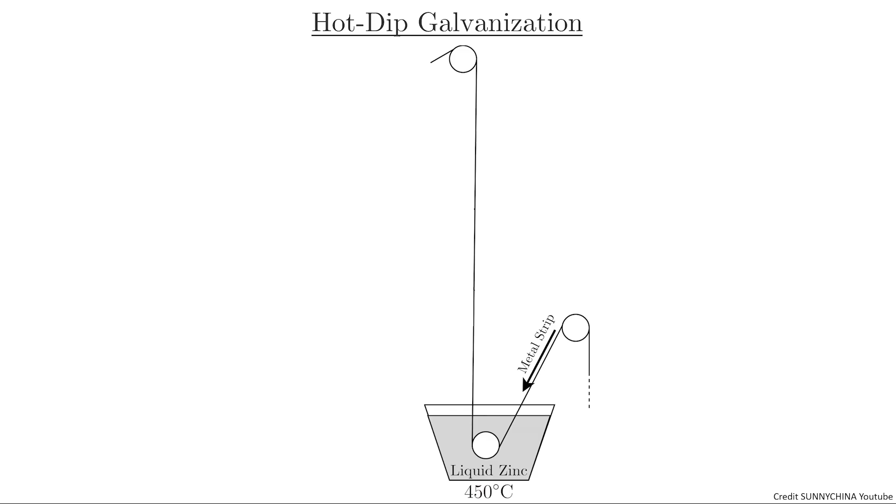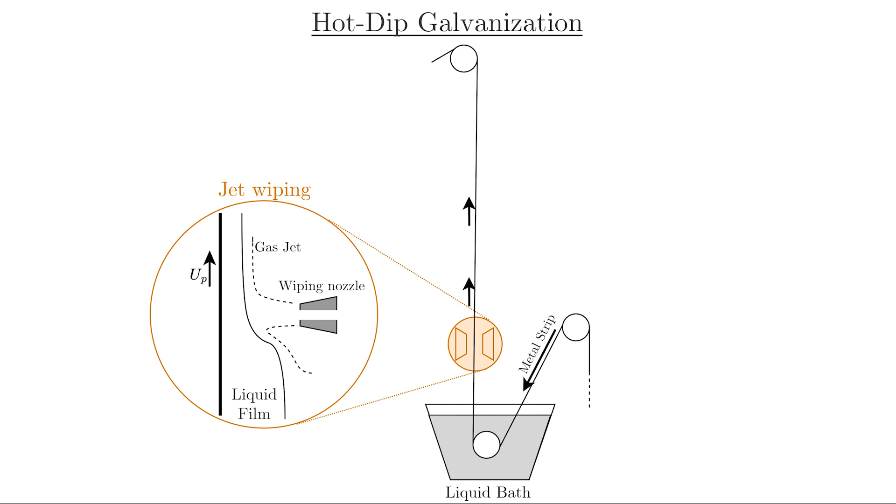The hot-dip galvanizing process consists of dipping a metal strip into a bath of molten zinc and then withdrawing it vertically at constant speed. The zinc entrained by this movement forms a thin liquid layer, which later solidifies into a corrosion-resistant coating. While still liquid, an impinging gas jet removes excess zinc to ensure the desired final coating thickness.

Withdrawing the strip too quickly can cause the jet to oscillate, leading to undulating waves in the liquid, which result in reduced final product quality and the need for additional surface treatments.

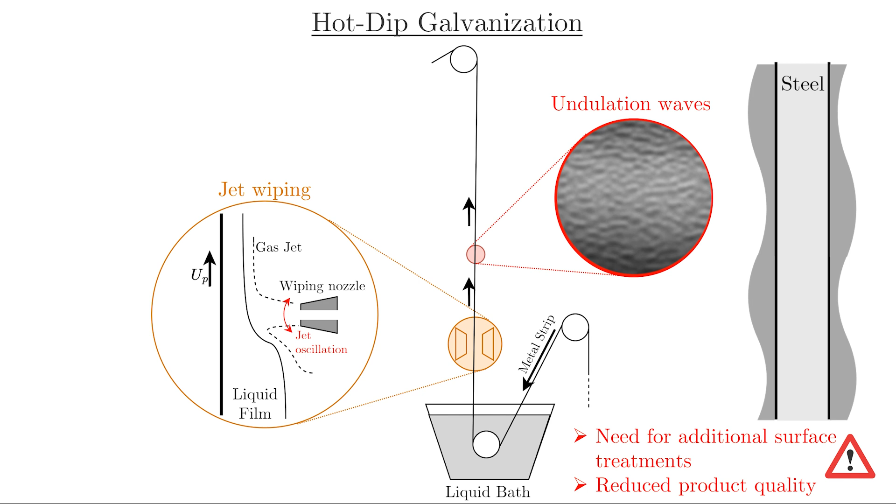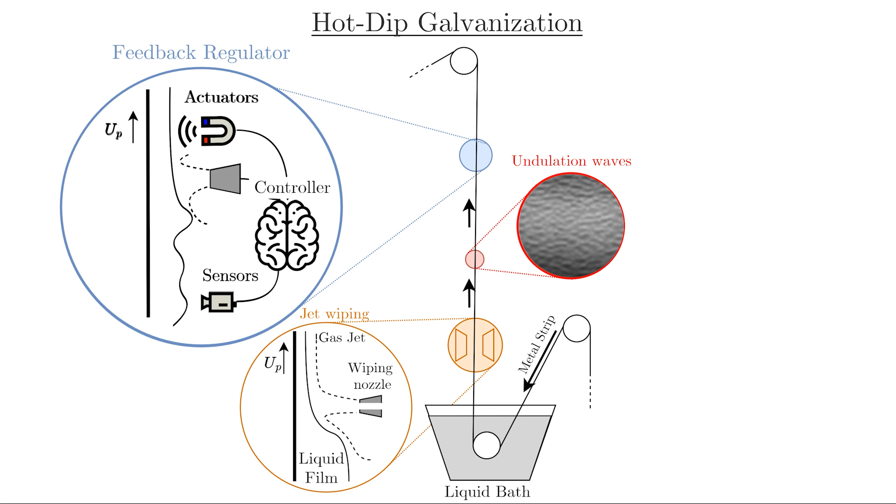To cope with this problem, a solution with a feedback regulator has been considered, where a series of actuators interact with the liquid film to reduce the amplitude of the undulation waves based on observation of the liquid film thickness from a set of sensors and following a control logic embedded in a controller.

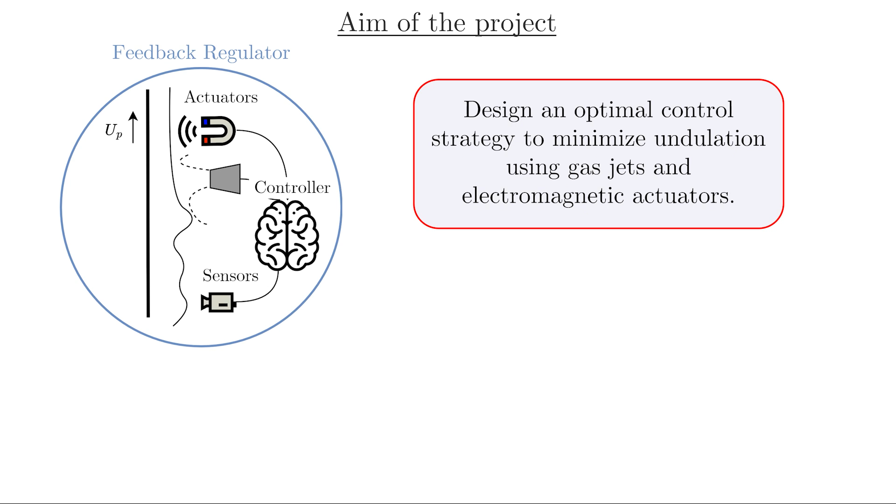The goal of this project is to develop an optimal control logic for the controller to minimize undulation waves using gas jet and electromagnetic actuators.

To achieve this goal, we addressed three main research questions: Where should we place the observation point? Can we simplify the governing equation to facilitate our analysis? And how can we design an efficient control law that performs well under different conditions?

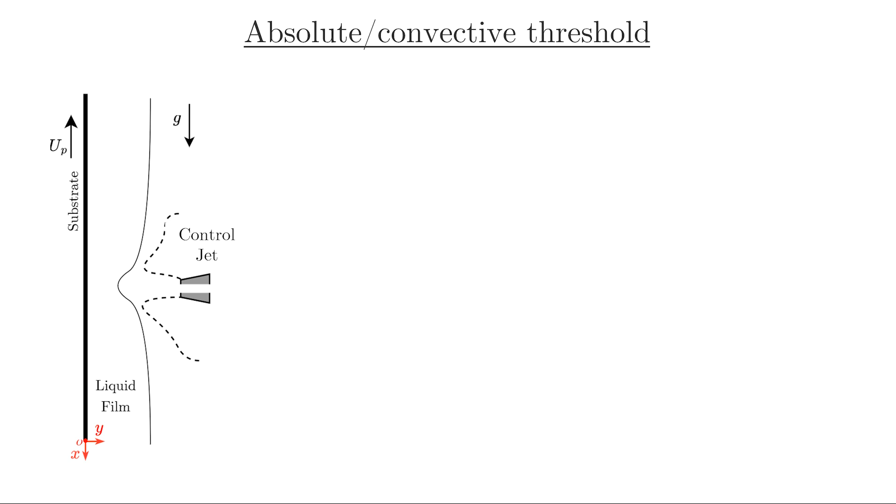To position the observation points, we studied the impulse response of the liquid film. So imagine a flat liquid film perturbed by an actuator. This disturbance generates waves that evolve over time in a way that depends on the film thickness.

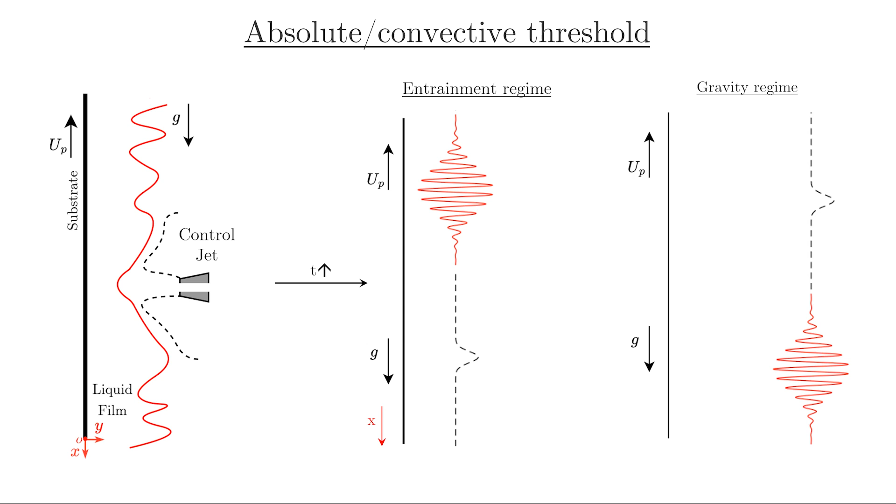In a thin film, the entrainment of the substrate causes the waves to be convected upwards, whereas in a thick film, gravity causes the waves to be advected downwards. Between these two extremes, there must be a range of liquid thicknesses where these waves spread throughout the entire domain.

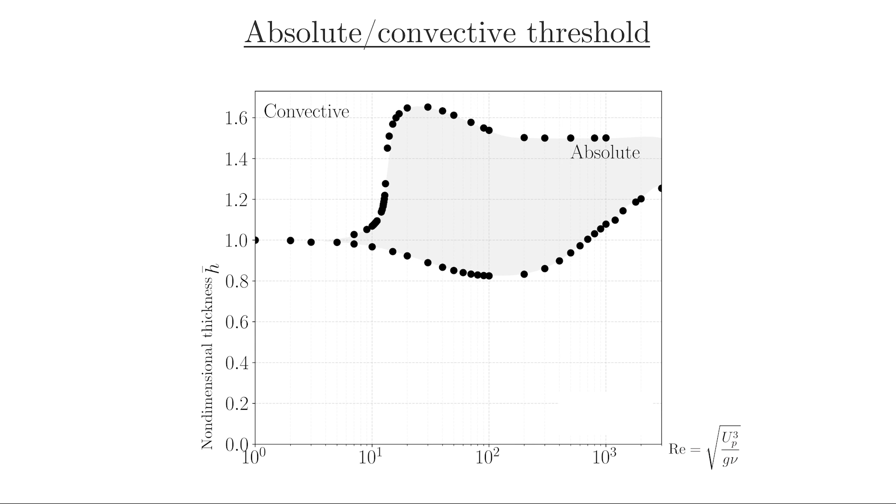Showing absolute instability characteristics, by solving the linearized Navier-Stokes equations, we identified this window of absolute instability in the space of Reynolds number and non-dimensional film thickness. However, as we can observe, the conditions of hot-dip galvanizing lie well outside this region.

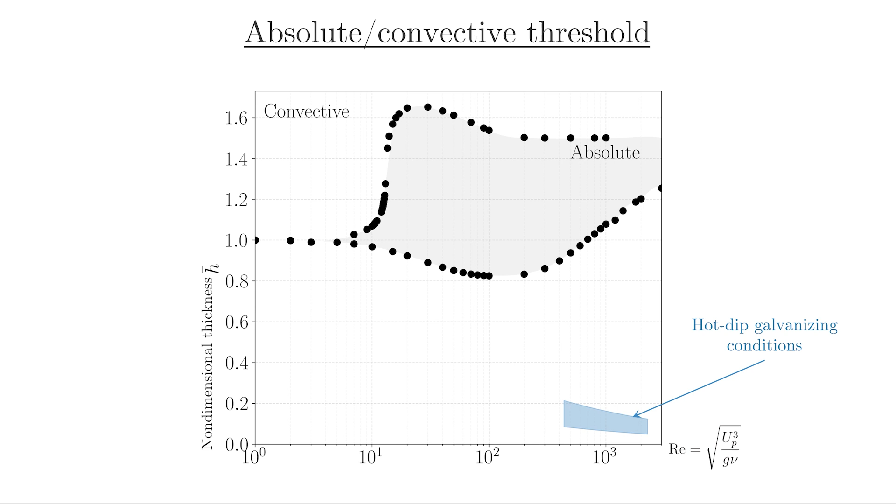This means that when we perturb the liquid film at a specific point, the disturbances will be carried upward. Based on this result, we can safely place the observation point upstream of the actuators, as their influence won't be captured by the observations, which only observe the incoming undulation waves.

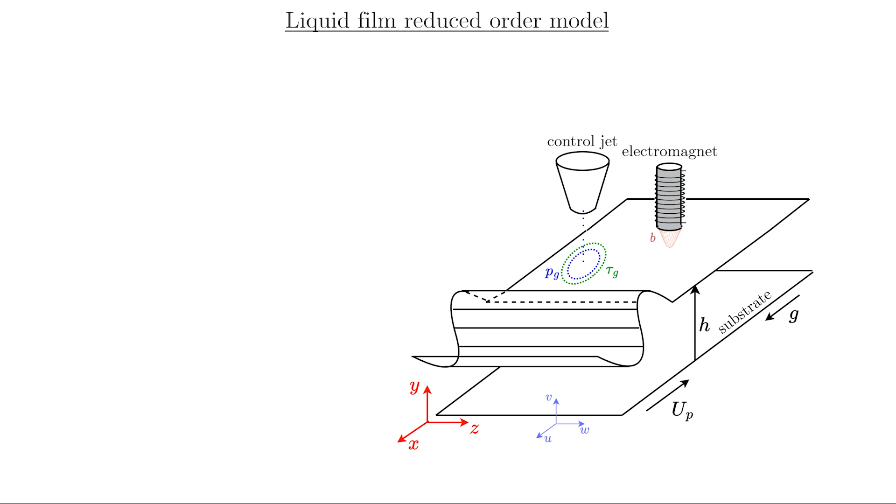So we now turn our attention to the simplified liquid film equations. The 3D liquid film affected by gas jet and electromagnetic actuators is governed by complex magneto-hydrodynamic equations, which are computationally demanding and challenging to solve.

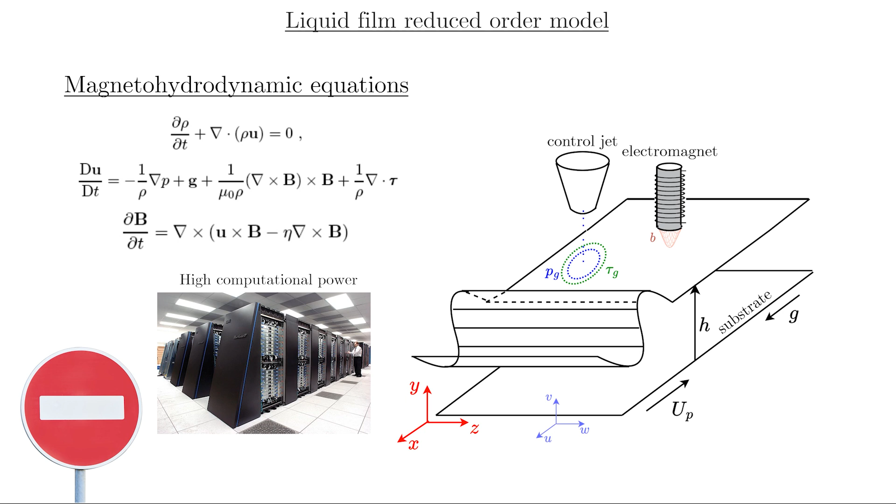So, to circumvent this problem while retaining the key physical characteristics, we developed a simplified model for the liquid film. This model consists of a system of equations in terms of the liquid film thickness H and the flow rate Q, where F is the flux matrix representing the convective effect, and S is the vector of source terms.

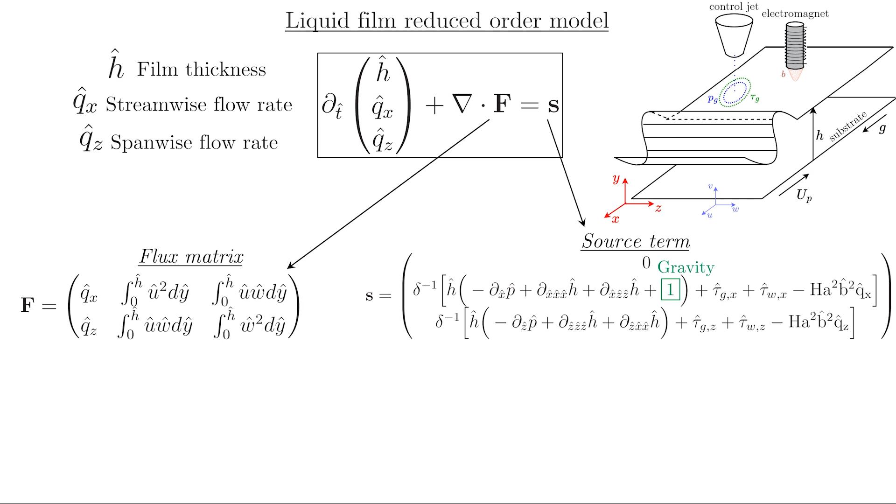Accounting for gravity, the shear stress at the substrate, surface tension which acts as a restoring force that brings the liquid film back to a flat state, the external actuators exert their influence through a pressure and shear stress distribution at the free surface, as well as a Lorentz force for the magnetic actuators which pushes the liquid downwards.

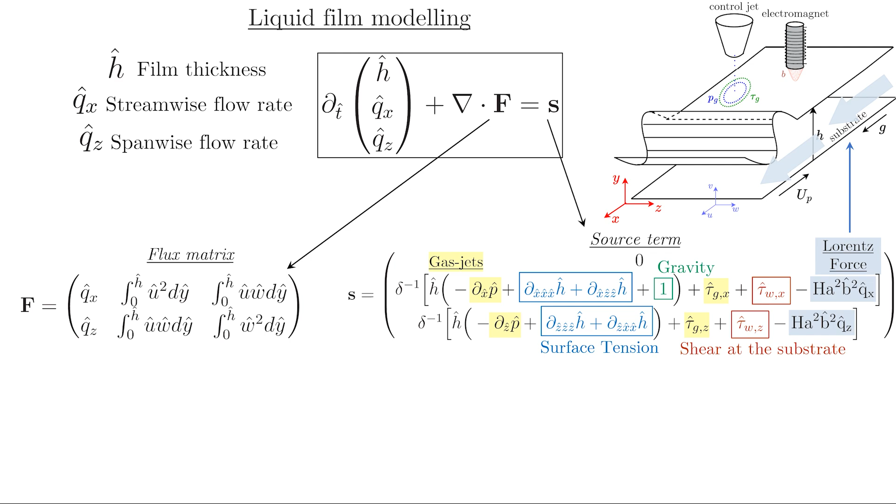With the observation positioned and the mathematical framework defined, we now derive the optimal feedback control law to manage the actuators based on liquid film observations. The optimal control law can be derived using two different approaches.

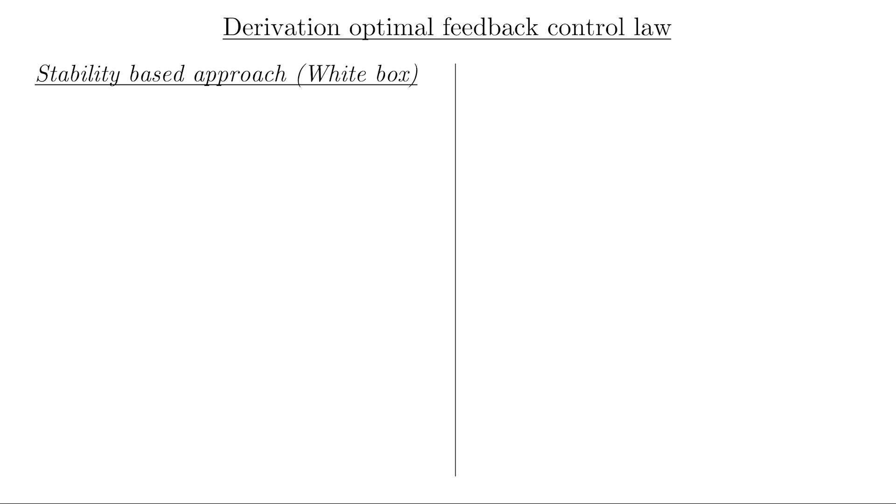White box and black box. A stability-based approach is white box: the equations of the simplified models are fully known. The control law is derived through linearization and optimization, aiming to determine the optimal feedback coefficient that ensures the liquid film is always linearly stable.

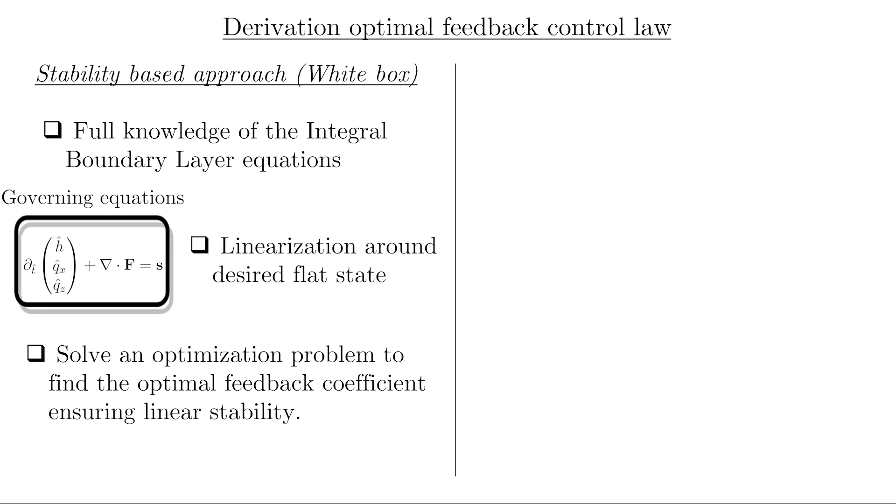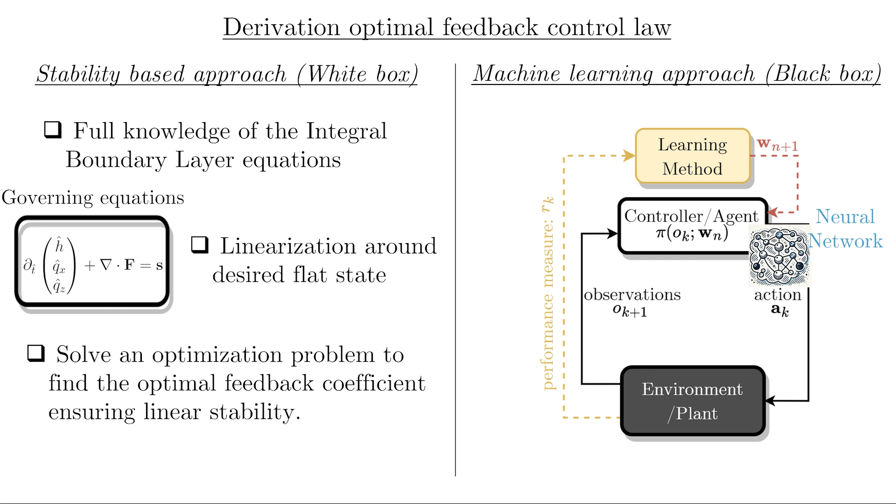In the black box machine learning approach, the governing equations are hidden in a black box. The only way to interact with them is by passing an action and receiving observation of the liquid film, along with a reward function that indicates how well the control action is performing. Based on this information, a new action is selected using a feedback control law provided by a neural network, whose weights are updated through a reinforcement learning algorithm to improve the controller performance over time.

The advantages of the stability-based approach reside in its speed, efficiency, guaranteed system stability, and reliance on a large body of established literature. However, it is limited to the linear dynamics of the system, is applicable only when waves have small amplitudes, and relies on predefined models. It also struggles with real-life conditions involving uncertainty and noise.

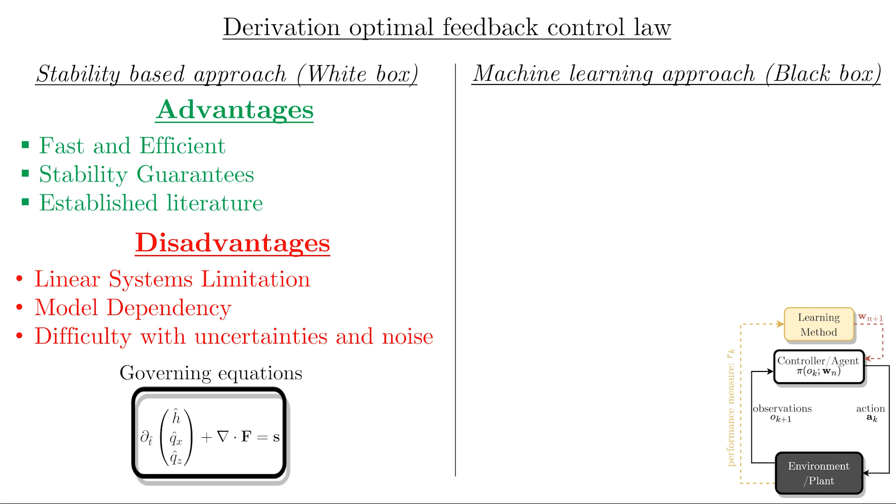On the other hand, the black box approach is independent of the model, can handle nonlinearities, and adapts easily to varying conditions. However, it lacks stability guarantees, is sample inefficient, requiring many liquid film simulations to learn the control law, and demands significant computational resources.

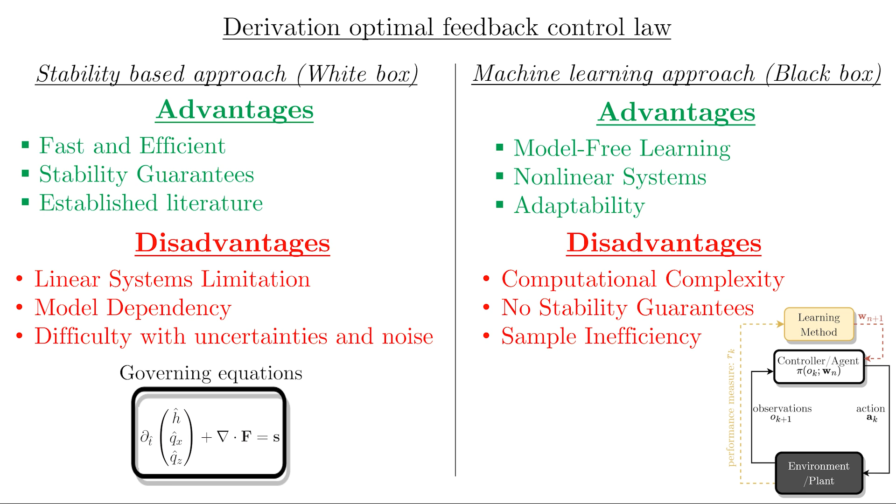Based on these considerations, we thought of combining the two approaches, using the machine learning approach to handle large amplitude waves, and then switching to the stability-based approach once waves become small enough.

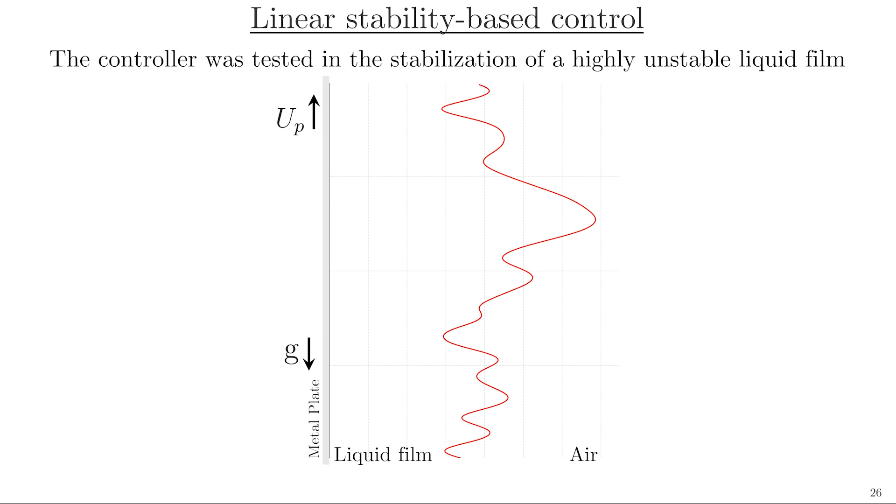To evaluate the performance of the linear stability-based controller, we applied it to control a highly unstable liquid film, one much more unstable than what is typically encountered in the undulation problem. In this scenario, waves go down the film while increasing in amplitude.

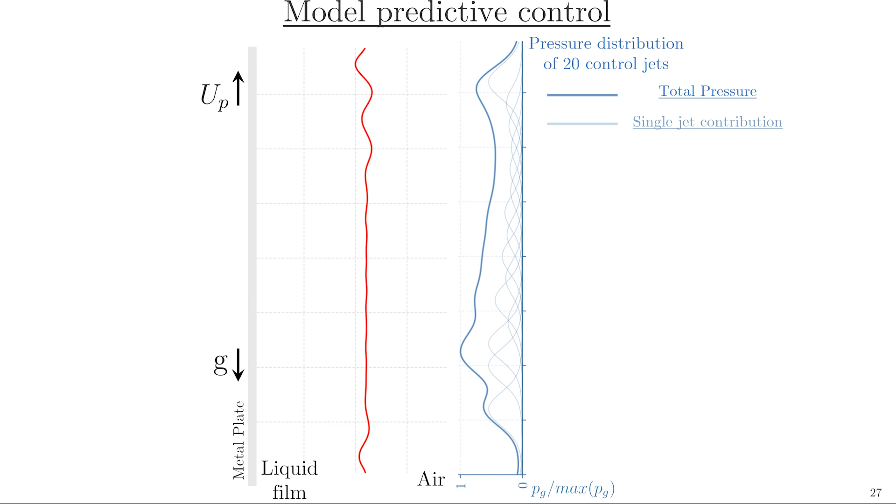As we can see, the control action begins at t=10, and within a limited amount of time, the actuators bring the liquid film to a flat state. Even after the film is flat, the actuators continue to operate, as it is an unstable equilibrium.

Moving now to the machine learning control for the large amplitude waves, we consider a setup with 2D gas jet and electromagnetic actuators working together.

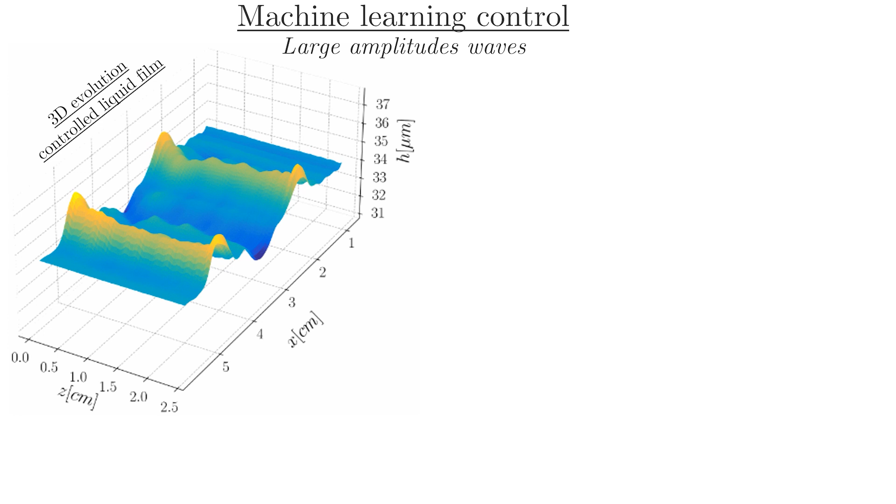We can see the 3D evolution of the controlled liquid film, its 2D color plot, the evolution of the gas jet intensity shown by the blue line, and the magnetic field intensity shown by the red line. Additionally, we have a plot along a line comparing the control case with the uncontrolled one.

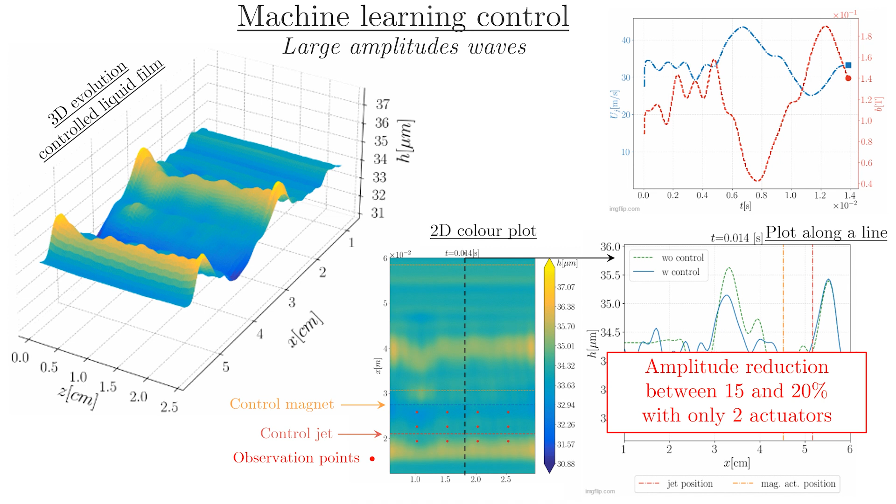The interaction of the actuators with the undulation waves is evident. The gas jet pushes the crest, while the magnetic actuators lift the valleys through the Lorentz force. This complementary control strategy reduced the amplitude by 15 to 20%, which is an excellent result considering only 2 actuators are used.

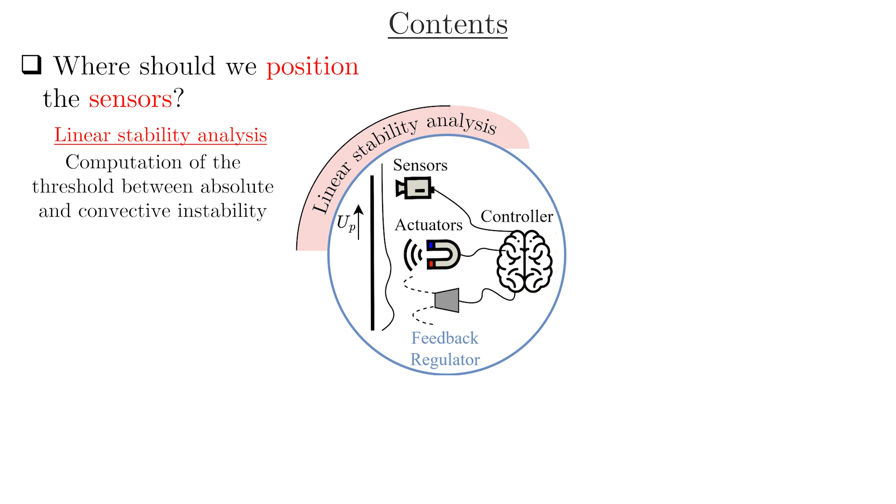To wrap up, in this research we have seen how we address a complex industrial problem using an interdisciplinary approach, which allowed us to answer both theoretical and practical research questions, leading to a sizable reduction of the undulation amplitude.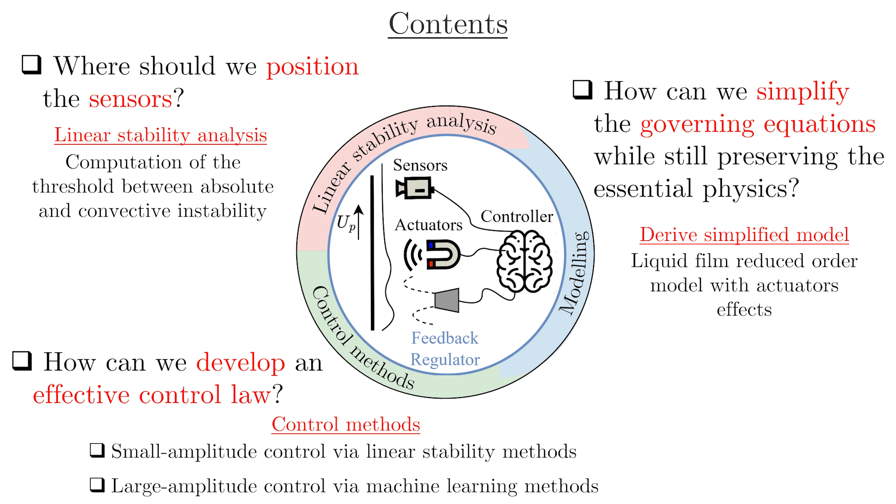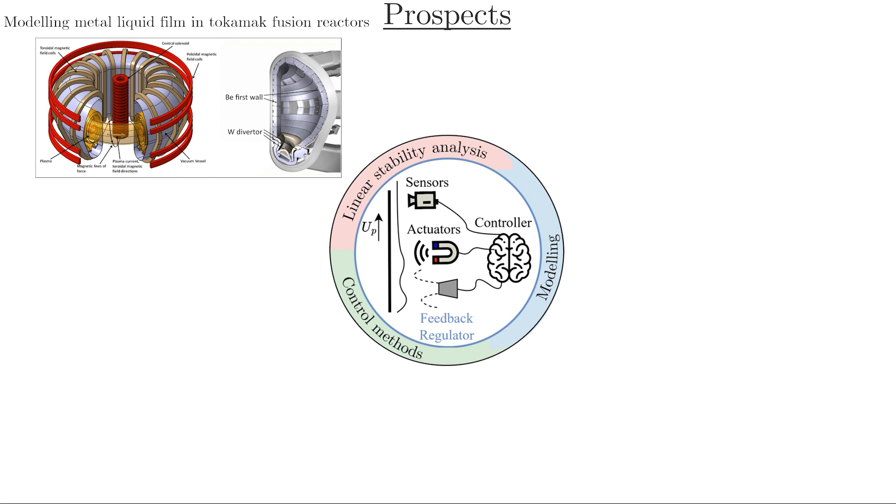However, the results and the method developed in this research have applications beyond the field of coating flows. For example, the magnetic model can be easily adapted to study liquid metal walls in tokamak nuclear reactors. The analysis of absolute and convective instabilities offers valuable insights for a wide range of fluid systems. Additionally, the control methods developed can be applied to falling film heat exchangers, flexible electronics, and liquid Galinstan applications.

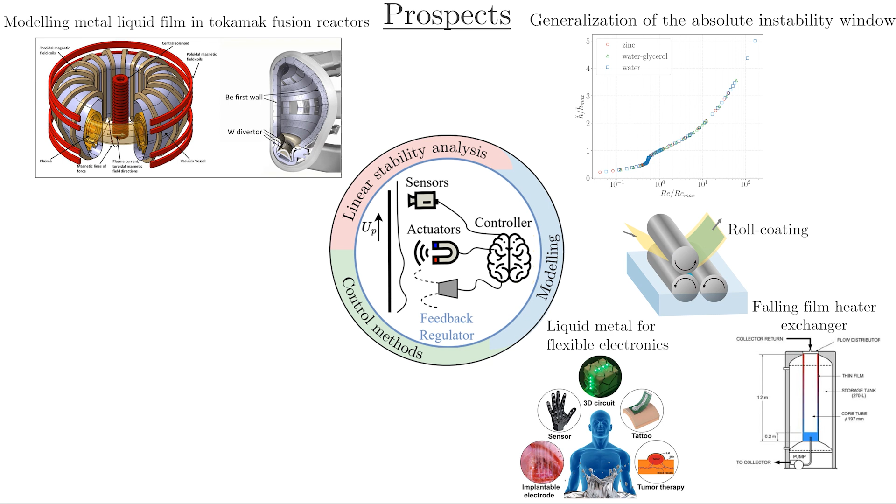And last but not least, an experimental campaign is planned to take place at the von Karman Institute, where a flow of Galinstan will be controlled by magnetic actuators with a control law based on the results of this research.

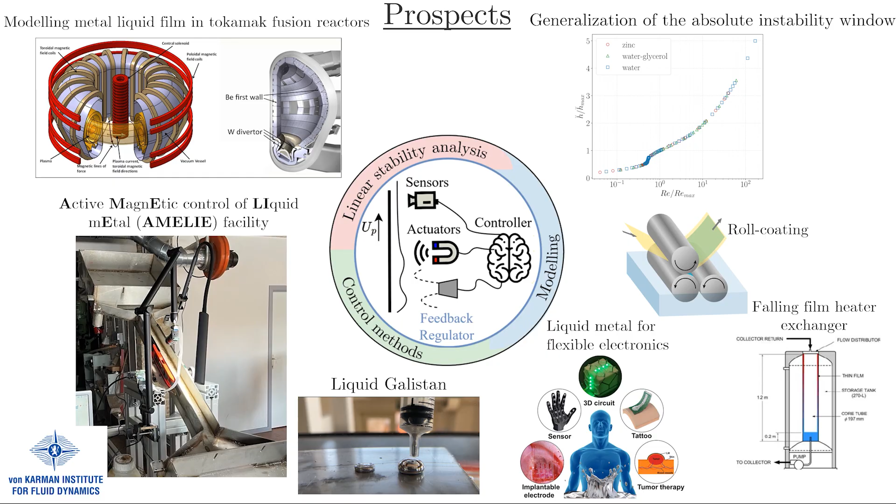This research showed that the feedback regulator can enhance the hot-dip galvanizing process, improving efficiency and sustainability. By developing an optimal control law for the feedback regulator, we minimize the undulation instability, allowing for higher production rates and reducing the environmental impact of the process. The results and methods introduced open new avenues for research across fields, paving the way for further advancements.